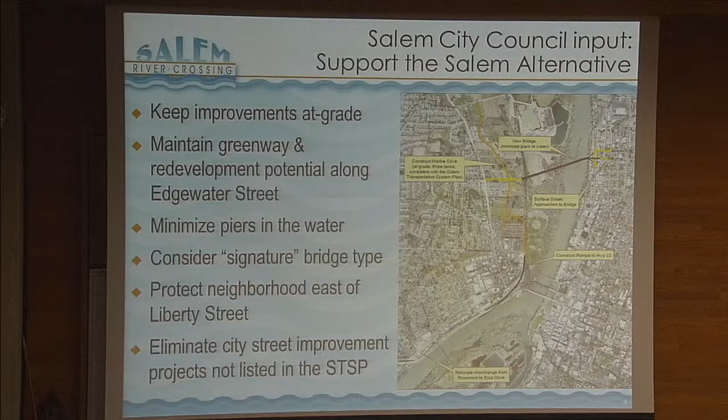And to eliminate all of the street improvements — and there were significant numbers of street improvements, especially in West Salem, that were not already listed in the Salem Transportation System Plan in support of 4D. So just keep it to the projects that were already on the Salem Transportation System Plan. So that's just by way of review.

What the oversight team did in selecting the preferred alternative is they, in essence, adopted the Salem alternative with some specifics. One of them was that there be a direct connection to Highway 22.

And you see the ramps — I know this is hard to see, that's why I printed the slides out for you — but the overhead ramps that connect Highway 22 onto Marine Drive, that Wallace Road at Orchard Heights be widened a little bit, and that Marine Drive be in fact constructed consistent with the Salem Transportation System Plan, so that as these ramps come down, the intersection at Glen Creek be at grade, and then that the remaining portions of Marine Drive be at grade, and that Marine Drive end at River Bend Road, which is exactly what the TSP says.

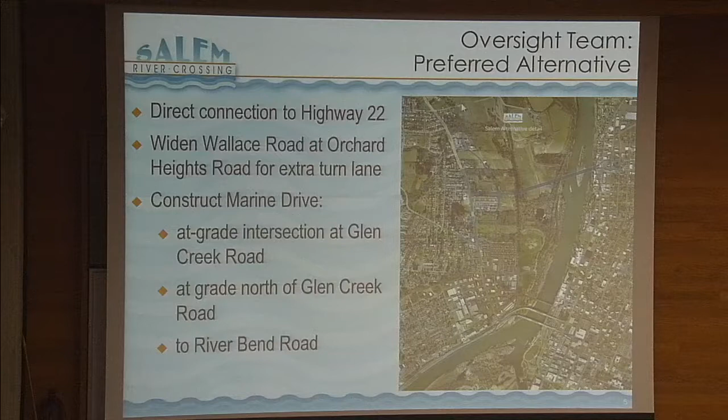For the bridge structure itself, the oversight team has instructed that it be 2 lanes in each direction — 2 lanes eastbound and 2 lanes westbound — that there be robust bicycle and pedestrian facilities included as part of the construction, that it be able to be designed as either 1 or 2 structures, and rather than the curvilinear alignment that I think 4D had, the oversight team's recommendation is that it be a straight alignment over the river to allow for, as council had recommended, reduced piers in the water, and then to be able to evaluate signature bridge types.

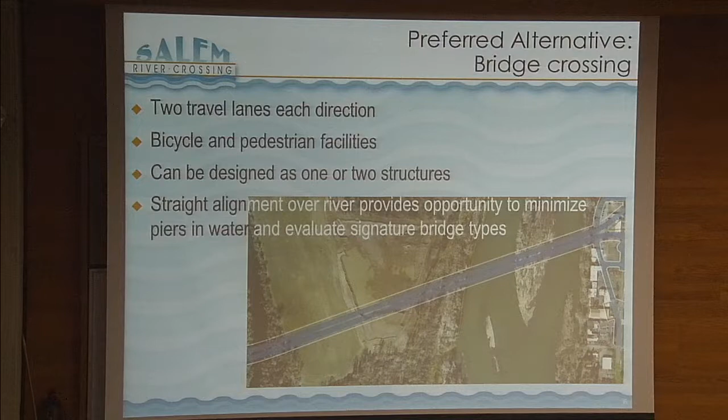So that work was done last summer, or a year ago — it's been a little while — when in essence the Salem alternative was adopted as the preferred alternative by the oversight team in February of this year.

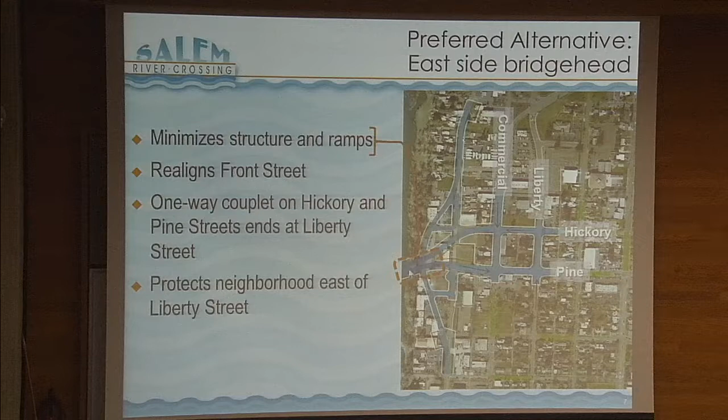With respect to the East Bridgehead, the preferred alternative also spoke to minimizing structures and ramps. What you see here, I have highlighted the piece as the bridges, as either the one bridge, the ramps off the bridge. What's highlighted in a little darker blue, with a box around it, is the stuff that's structural. The remainder is either an abutment or comes down onto the ground. So by the time these things reach Commercial Street, these streets are at grade.

I wanted to be very specific that this is the part that's still up in the air, to allow for Front Street to come under, and then these start coming down — Pine Street is one way to this point, Hickory is one way from this point onto the bridge. Commercial, of course, is already one way south, Liberty is already one way north. There was a lot of discussion about Hickory being only a right-in, right-out to discourage through traffic through the neighborhood, and then Pine, of course, is our arterial that already exists.

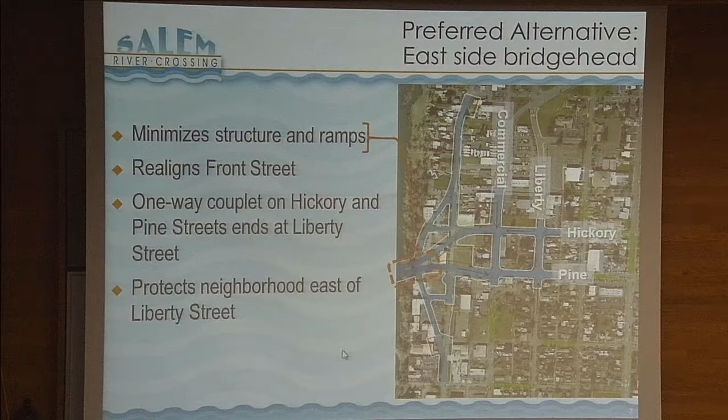So the realignment of Front Street, again to reduce the impacts of the bridge, the one-way couplet, and protecting the neighborhood. Okay, on the west side, the Salem alternative spoke to moving the...

Interchange here with Edgewater, moving it over to Eola. There was a lot of discussion, a lot of analysis related to that. There are some significant issues related to that. The issues were such that the recommendation was that there's an understanding that it needs to move. We're not quite sure — the oversight team did not come to a conclusion as to exactly where to move it to.

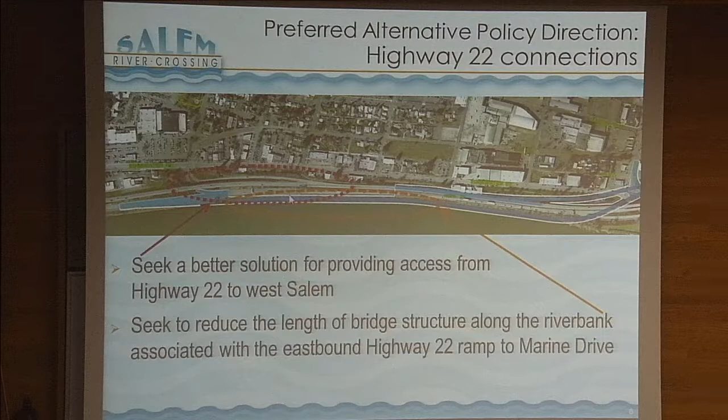But there is some policy direction related to seeking a better solution for this access, recognizing that this is not the right place — there needs to be a better place for it, whether it's at Eola or Doaks Ferry or something else. And if we can remove the on-ramp, this very long stretch of ramp that leads to the connection to Marine Drive could be significantly shortened to reduce the visual and possible environmental impacts to this part of the improvements. This long ramp has everything to do with the weaving — not wanting these cars to be able to move over and weave onto this ramp for safety reasons.

In addition to the bridges and the roadway system, the Oversight team also spoke extensively about bicycle and pedestrian safety. There is some policy direction related to creating separate bike and ped facilities as part of this project, and to encourage some looping. I'm going to show you some work that's already been done.

There was also extensive work done on creating transit supportive improvements, coordinating with transit about where to design stop locations, and considering transit supportive amenities in the design, so that the bridge and Marine Drive and its intersections with Highway 22, and its connections with Pine, Hickory, Liberty, and Commercial, be transit supportive.

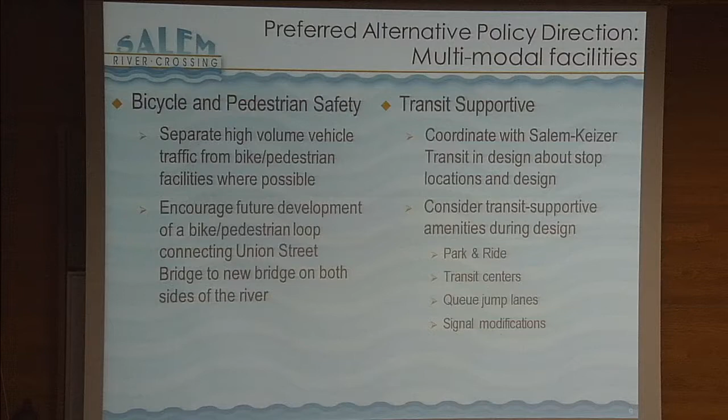I know this shows up pretty good on the slides here. So what I wanted to show you is that the blue represents the street improvements proposed in what is now the preferred alternative. I want to show you the work that's already been done for pedestrian and bike facilities.

The green is the beginning of the concepts, and this is by no means a design, and by no means the final recommendation. But I wanted to make sure the council understood that there's already a lot of work being done to think about how to connect Union Street. This is the Union Street bridge, and this is the connection that comes down.

There would be a ramp that would come up along with the ramps so that bicyclists and pedestrians can come over the Wallace Road interchange here with Highway 22, and then be able to either come down onto Edgewater or make the connection back underneath and onto the existing bridges.

This is our pedestrian connection on the existing bridge, and you'd be able to make that connection right there, and then this connection along the Greenway. So a lot of thinking is already taking place at the EIS level, not waiting for design, as to how this may be possible.

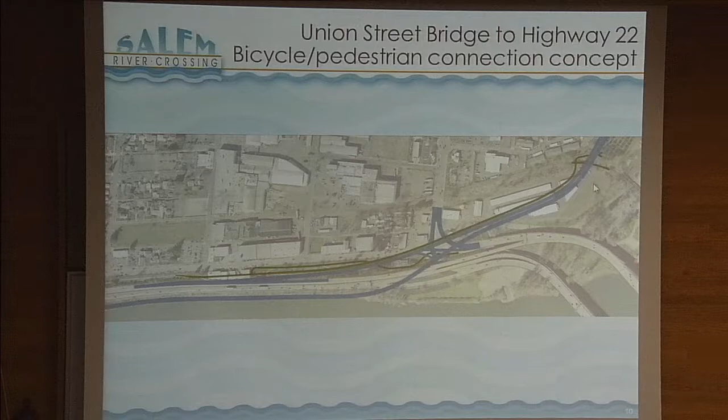Same thing on the east side. This is an attempt to start to think about, for a bicyclist coming down Commercial Street, how bicyclists and pedestrians can not only get on the westbound bridge, but also avoid the intersections on Commercial Street.

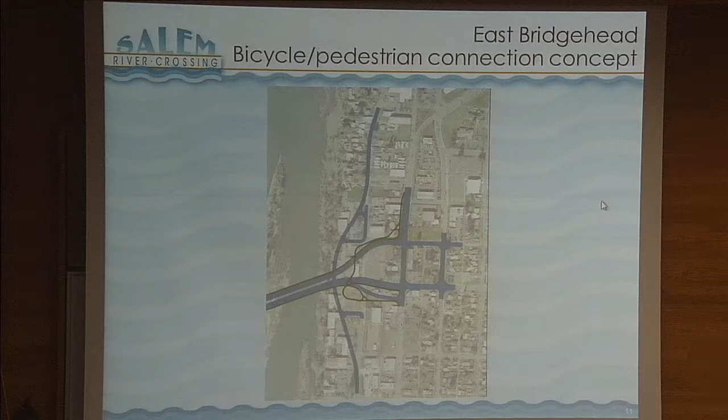So how they can come down and underneath the bridges and then either connect to the eastbound bridge or get back down onto Commercial Street, again without having to cross the interchange. This is not the only solution. There may be other solutions, but again, just starting to think about what is possible.

I wanted to show the council the results of the good work related to the Salem alternative. Under Alternative 4D, you see a summary of what the impacts would have been under the original 4D for displacements, tax lots, properties impacted, and acreage required, and how much fewer it is under the Salem alternative. So good work that's already been done, influenced by the council's recommendation, and we can already see the changes as we move forward.

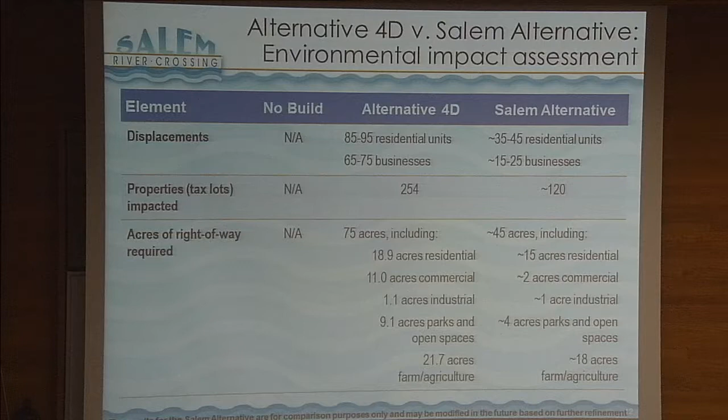Okay, so that's the Salem alternative. The next step is selecting bridge type, the part about selecting a signature bridge. I want to talk a little bit about how the Oversight team went about selecting it. The Oversight team members are here, so you can get into that discussion with them in a few minutes.

One thing I want to clarify is what the oversight team has done is select a type. The bridge type is part of the EIS, and it establishes the general form of the load-carrying structure and the general shape. Then there's another part that comes as part of the design, after the EIS, when we're actually designing the facility. The design establishes the size, shape, and proportion of bridge elements, bringing forth aesthetic goals. I want to show you two pictures. Neither is the type that was selected by the oversight team, but we wanted to show you this example — this is a beam type bridge. They're both beam type bridges.

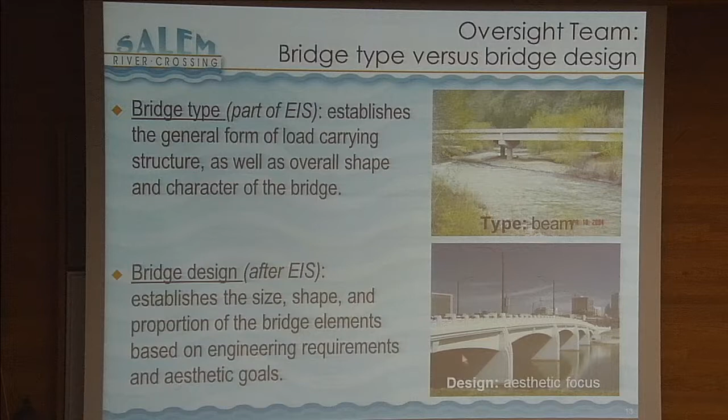The top is a very simple beam type, obviously in a more rural area. The lower one is a beam type bridge with aesthetic qualities put into it. So the difference between the top, which is what the oversight team has recommended, and design, or what comes later. Just to start getting a sense that there's a lot of work still to be done to get from the simple type to what is actually designed.

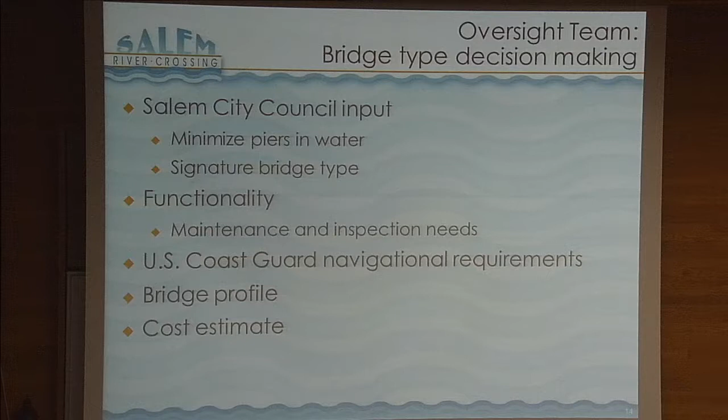So what the oversight team did in selecting the bridge type is they considered the council input about minimizing the piers in the water and addressing the signature type bridge. They thought about functionality, maintenance, inspection needs of the facility after it's built, and constructability. They thought about the Coast Guard navigational requirements. Both channels on both sides of that island are still navigation channels that the Coast Guard administers.

They thought about bridge profile. Should it be a big bridge? Should it be a simpler, cleaner line, if you will? And they thought about costs and where we would be with respect to the cost of the structure.

So that left them the 3 alternatives, 2, 3, and 4: the steel tied arch, the cast-in-place segmental concrete, and the segmental precast. 3 and 4 are very similar to each other. After some additional work that the consulting team and staff did, the oversight team recommended the segmental precast concrete box, or what's called alternative 4A, as the bridge type.

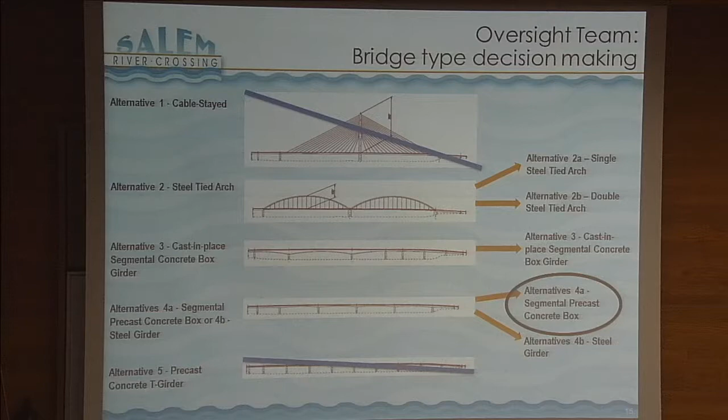So what is a segmental precast concrete box bridge? Let me show you first what it looks like. So the way it lays out, you can see that there are piers on the island. These are the navigation ways on the Willamette, and then there are only really 4 additional piers here in the water, and then they come into the banks.

Julie, I see you reaching your microphone. I was just going to point out that this is shown as 2 structures. It could be one. It could be designed as 1. You would have half the number of piers, but the piers would be larger, so the square footage would be the same. These would be thicker, if you will.

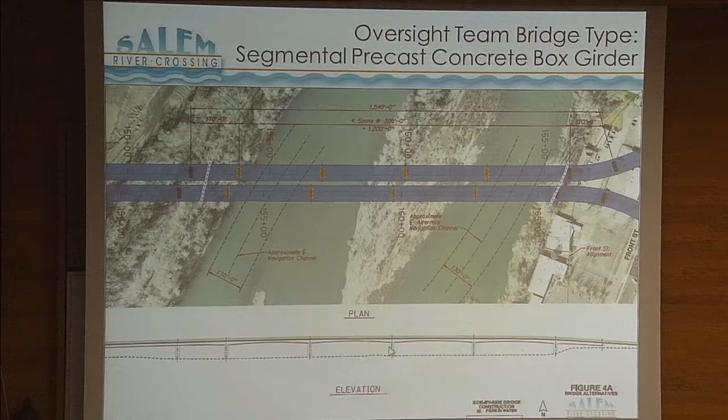And then it would still diverge here to address the traffic issues once it comes off. You see the center line of Front Street is right here, of the realigned Front Street. And then there's the elevation, thinking of the 2 pictures I showed you previously, here's the simple elevation of the bridge. In this picture, the island is underwater, this is a winter shot. In the summertime, the island reemerges back in here.

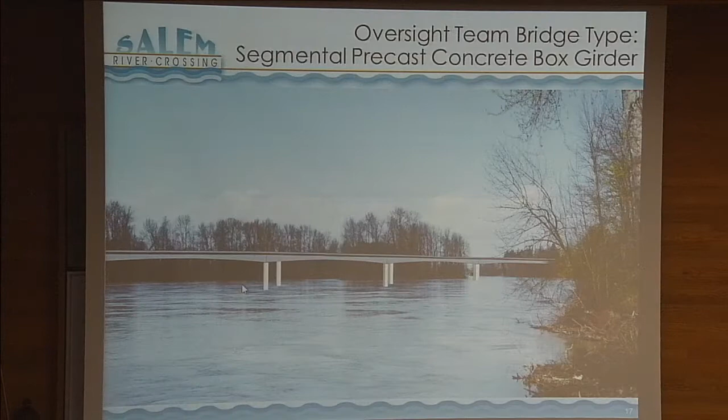And then just some pictures of what this structure looks like. So you can kind of see, if I go back one, these kind of arch-looking structures, you see the arch-looking structures here. This is the way the piers may look like. I'm going to show you a lot more pictures of what the piers may look like.

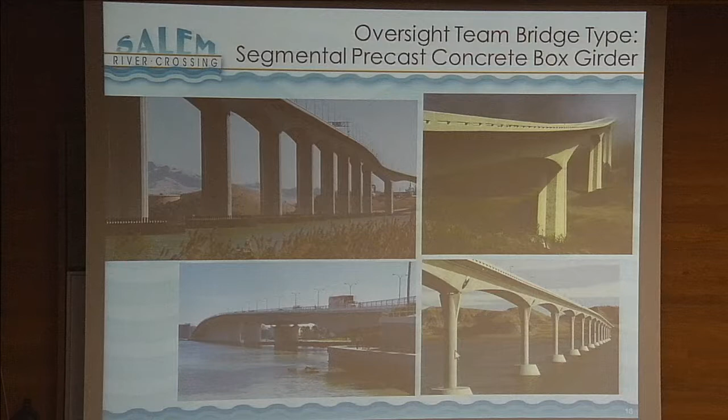And the other thing that's important to note is that the box girder is not like the Marion and Center Street bridges, which are beam bridges. So this structure is actually a box. You can see it here under construction - they're actually cast off-site and delivered, and then, to use a layman's term, they're glued together to become this kind of structure. So you don't see beams, what you see is this very clean line that goes across.

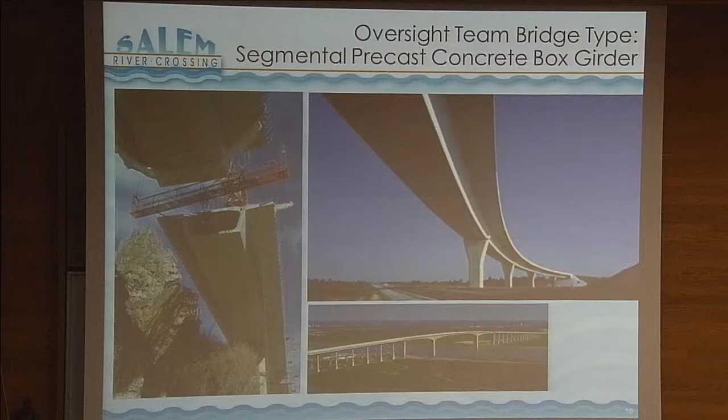So just so that the council gets a real good sense of what this kind of structure looks like. Okay, so that is the bridge type that has been selected.

So then the next thing is, all right, what about mitigation? So what I've shown you is very simple lines, the structural elements. In terms of bridge design aesthetics, we can obviously talk about the visual impact. There's a visual impact section of the EIS that policy can be put into so that mitigation can be addressed. The EIS can say we want the aesthetics addressed - we don't just want simplicity, we want some more work done.

Sonny Chickering can talk about some examples they've done in Eugene where aesthetics was put into the EIS, and then there were citizens committees or technical committees that helped with that. The EIS under design aesthetics can specify the process, the committee example, and identify parameters and key policy directives. We'll also talk about east side impacts, including mitigation measures related to socioeconomic and land use sections of the EIS, again specifying the process and identifying parameters.

One of the things the council directed us to do was to already start looking at planning for the east side land use planning. We did attempt to get a transportation growth management grant that was not awarded in this round. We would expect that when TGM comes again in a year or two, we can continue to seek out those grants. What we heard as feedback is that once the EIS is completed so that this process is set, that grant could have a better chance of being awarded, since we'd know we're headed in this direction.

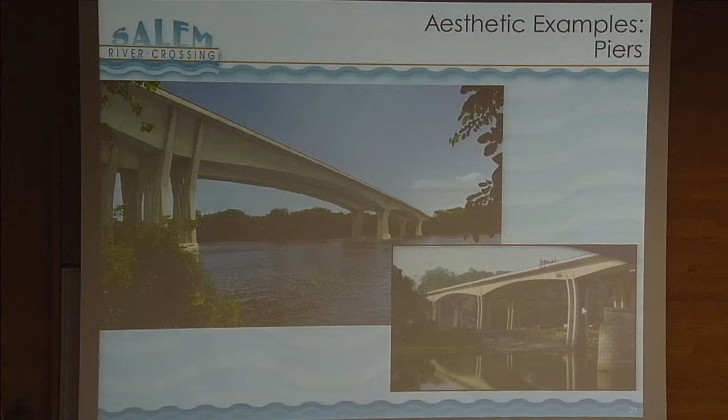Okay, so just some aesthetics. The first thing is that we can certainly bring a signature feel to the precast box girder through the design of the piers. So you see here this kind of design. What I showed you before was very simple piers. Well, here's a more dramatic pier. In fact, this is very similar to the crossing of the river, so you can see what that could look like. Here's another kind of pier, a more complete pier, but with the middle done in a different color and texture.

I've also highlighted, though I'm not going to have a slide on it, pedestrian lighting. You can start to see that this is another design element we can select, pedestrian lighting that's a little more pedestrian friendly or a little more attractive than just the standard aluminum, fiberglass luminaire.

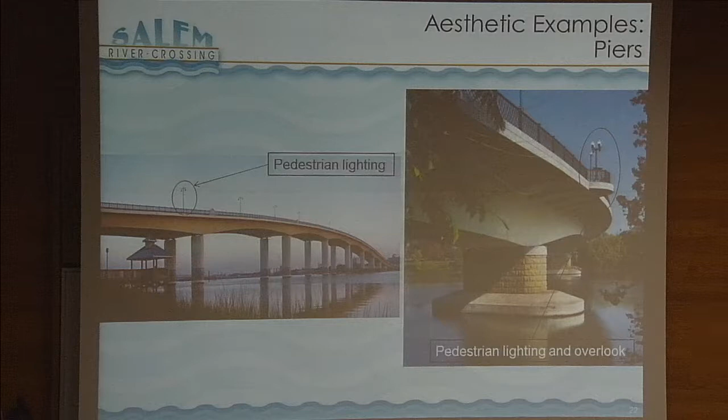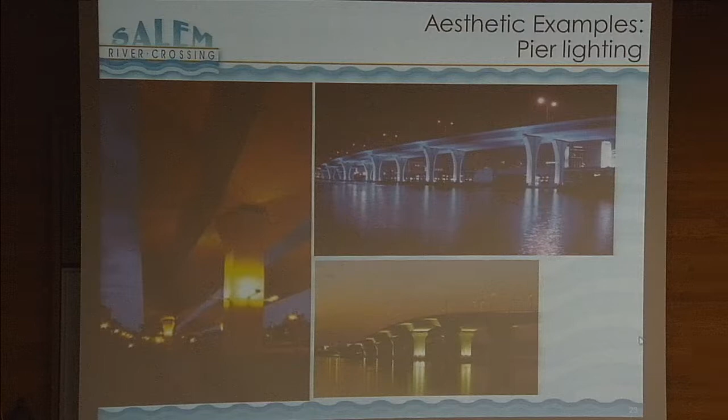Lighting is another thing that can be brought to bear on the bridge, and you could certainly think about pedestrians standing on the Union Street Bridge and looking out to the north at night and being able to see something like this. Not very expensive to install, but it can be designed to provide a little more drama on the river crossing.

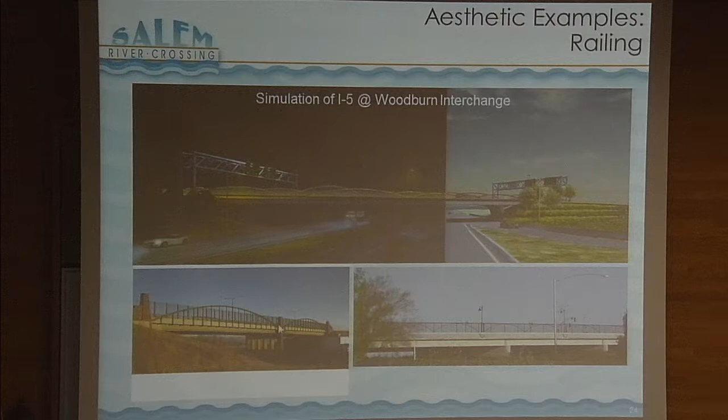These are a couple of bridges. What I'm really trying to show here is that these aren't necessarily the same bridge type, but I want to show you railing possibilities. Abutments: again, not the same kind of bridge, but these kinds of design elements can be included in terms of how you want to introduce the bridge to the motorists and pedestrians. You can see that these two bridges are actually the same bridge. So again, this is the kind of pedestrian lighting we have in town, which could certainly be introduced onto the bridge, as well as some abutment feature.

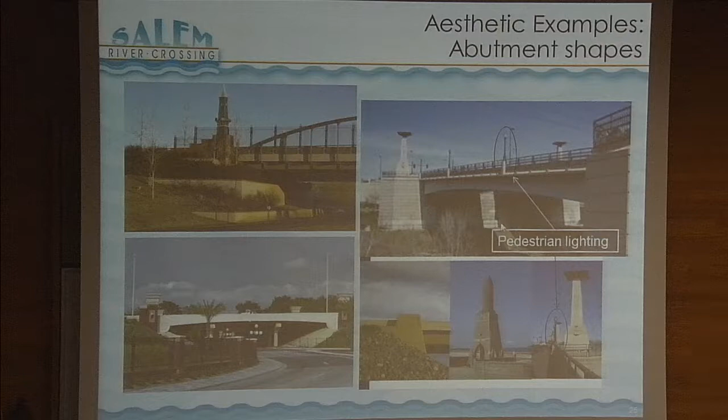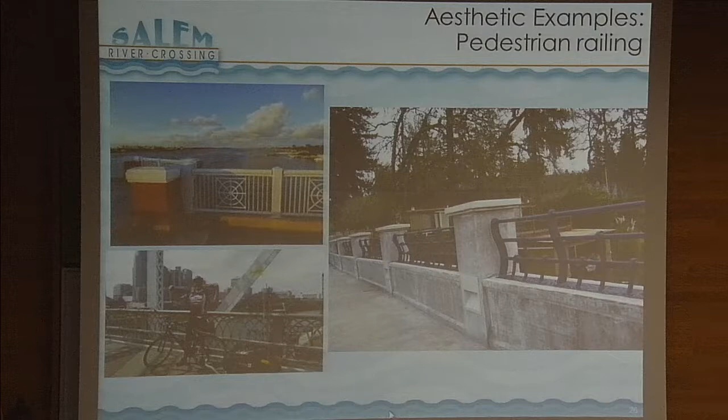Handrails: so many different kinds of handrails. Here are three examples, showing what pedestrians crossing the bridge would feel. So instead of doing some kind of big railing like the Woodburn interchange, this would be a different kind of treatment.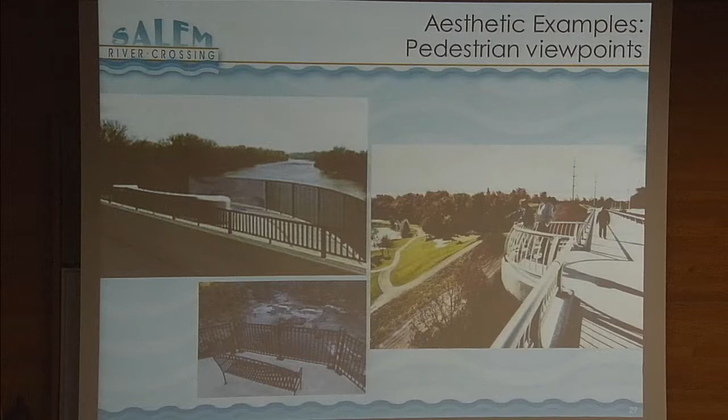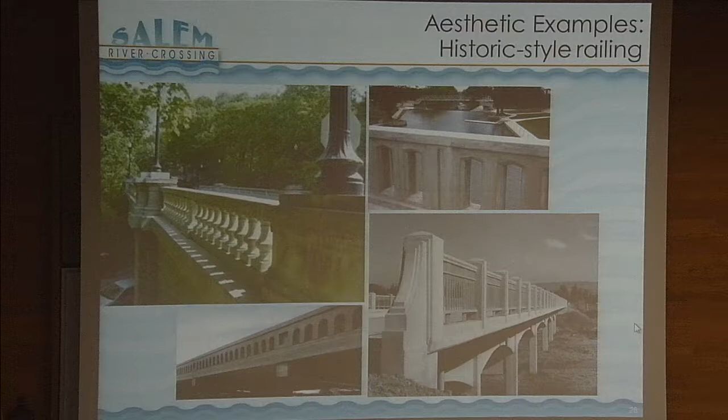So all of these are just opportunities, and what I want to show you is that there are a number of opportunities. Historic railings, you saw the work we did right out here on Commercial Street, where we recreated historic rail. This rail is actually very prevalent in Salem. We have some of it right here on High Street. And then just a little more modern interpretations of historic rails that could also be used. We're obviously not going to do a mishmash, so we would need a bridge architect to help us put it all together, but these are some of the aesthetic possibilities.

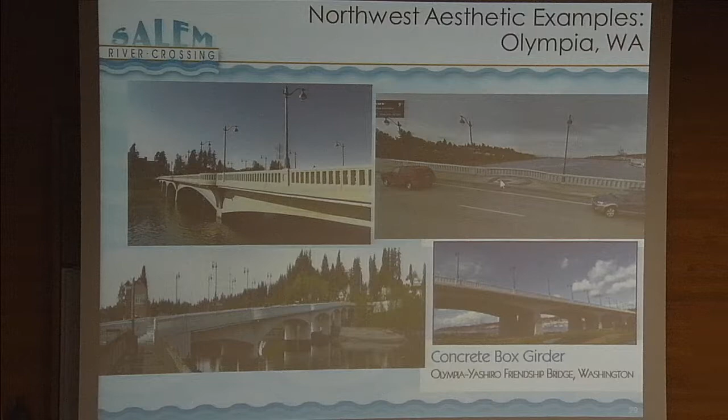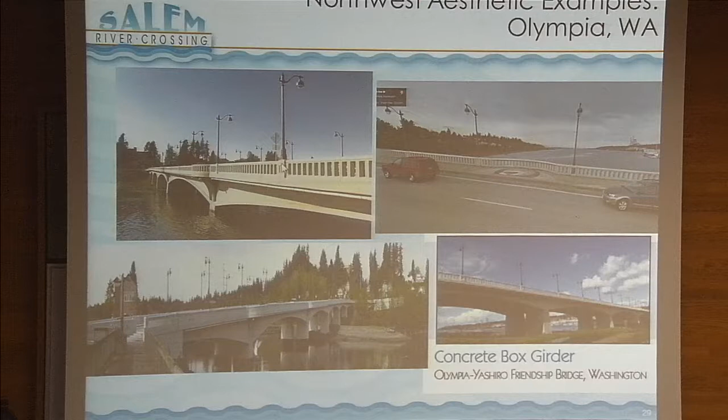And then here is what I call the Northwest aesthetic. This is a bridge in Olympia, Washington, and you can see what they did. This is a box girder, so it's the same bridge type, and you can see what they did with the handrail, what they did with the lamps, what they did with the overlooks. You can see the overlooks here. So, my personal opinion, a very attractive bridge. This is a much lower profile bridge, and it's not going over a navigable waterway, but these same kinds of elements could be introduced into our bridge.

A little discussion on the east side bridgehead, because as I've discussed this with councilors privately, I know there's a lot of concern about the east bridgehead and what's going to happen. I wanted to remind you that this is the part that's up in the air because of the council direction that we wanted to maintain Front Street, the connection to Front Street. So the way this is laid out today, this is up in the air coming down, either coming up onto the bridge or coming down off the bridge, and Front Street actually goes down a little bit to minimize the height of the bridge as it launches. And then Pine Street, obviously to the intersections, or coming off of Hickory and onto the bridge.

There are some things that could be done to address the bridge some more at the east bridgehead. If council wanted to recommend that the bridge launch from the bank, we could lower this part of the bridge further so that it had more of a street feel until you got to the bank, and then it would rise and go over. It's all about what we do with Front Street.

So a couple of options. We can disconnect Front Street. If we disconnect Front Street, we can envision more traffic—without running a model—on Commercial and Liberty, and perhaps some of the other streets in this neighborhood, as this traffic finds its way from north to south and south to north.

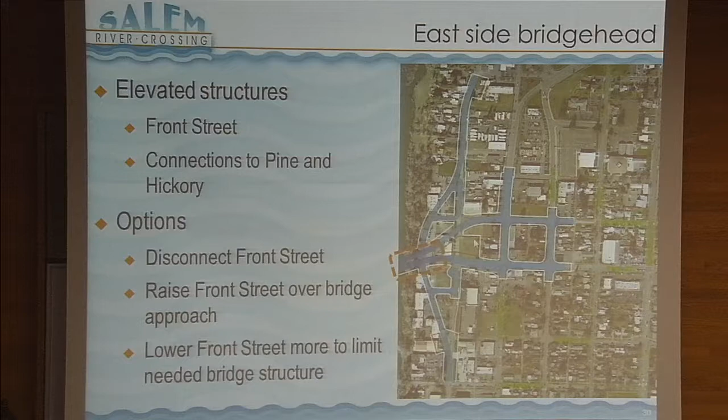Just a quick slide on next steps. There is a funding workshop on December 3rd. I assume everybody has gotten their invitation—the invitations went out on Friday, so if you haven't gotten it yet, you will be soon, getting them the next day or two—where all funding options are going to be discussed. And it's very important to provide our consultants with feedback about what options are really non-starters and which options are good possibilities, to feed that into the EIS.

Oversight team meets again on December 11th. And then if the oversight team is ready to make some final decisions, we are on our way to making the final EIS preparation, where we'll do refinements to the impact assessments, refinements to mitigation measures, which is what we're talking about today.

And then we're on to land use approvals, which there's a very tough row to hoe on, so we will be working on that the first half of 2015. And then once the land use approvals are complete, we will look to have a final EIS published.

And then seek a federal highway record of decision. And as I mentioned when we went through this late last year, the license is issued, and then it's a matter of waiting for the funding so we can fund design, and ultimately fund construction, which is a whole other process. So once again, the EIS is about getting this license granted to us as a region to be able to design and construct this bridge. And with that, I think we're ready for questions and discussion among the groups.

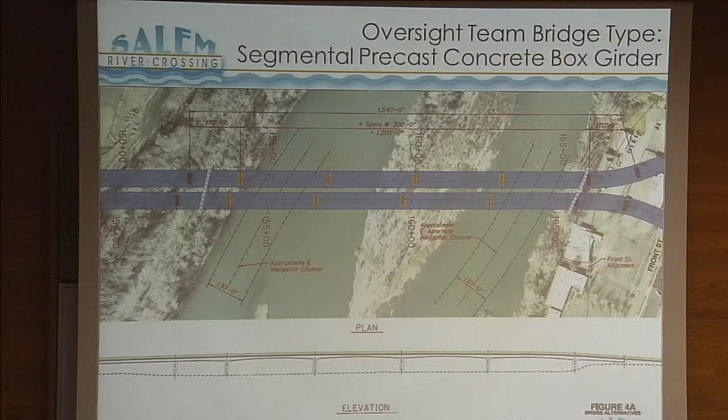What's important to note, though—let me get to the picture I have of the east bridgehead, because I think that's an important consideration. Irrespective of whether this is one structure or two, the approaches to the bridge have to be this one-way pair. Because if we don't do this one-way pair, these intersections—if we just had one bridge coming all 4 lanes onto Pine Street—these intersections become quite untenable, quite large. So what the staff and consultants are attempting to do is really minimize the amount of delay, so these aren't as wide as they'd have to be with just one bridge in both directions.

So we're creating this traffic flow here, and this traffic flow here, we can turn south or turn north or keep going, so that this is still a manageable area traffic-wise and not a massive intersection here. So this can be one structure.

This street still has to come in this direction, and this street still needs to come in this direction, so that this surface works. And this is being done, Councilor, to really protect this neighborhood, to keep this at a manageable level so that traffic flows smoothly. We're not backed up to here. People aren't punching through and then trying to come around here, because that's an important consideration for us in the community, to make it all work here.

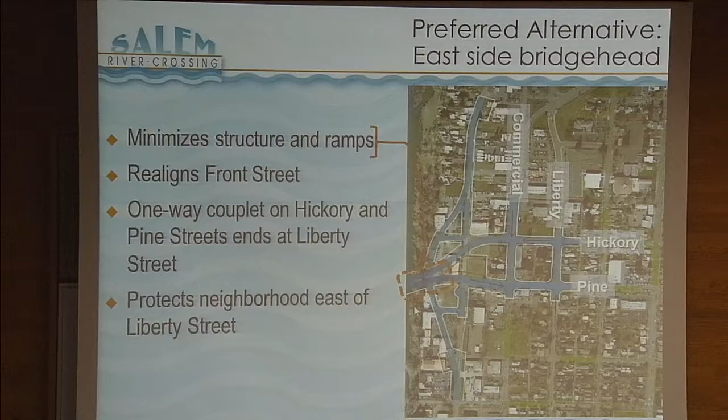Yeah, and I recall those directional plans with one bridge. Yeah, right. It can still be one bridge.

What I worry about, I guess, is looking at it, given sort of mission creep on this constantly over the years. I'm looking back over the years that this has been discussed, that it really starts looking like the plan is for ultimately a freeway through that neighborhood. Just to be honest with you, that you put 2 bridges there, and over time, this becomes really a regional solution.

Not what I'm interested in. I'm not interested in solving the big regional problem that ODOT has. I certainly am interested in solving the problems we have. But this has never struck me as the right location for the big regional solution, that belongs somewhere north of Salem. And that bridge is a different bridge, and that freeway is a freeway.

This starts to have that look, and it has all kind of all the structure in place to become that solution. And that's exactly not what we proposed back to the committee. They had their freeway. This looks like it's coming our direction again as a freeway.

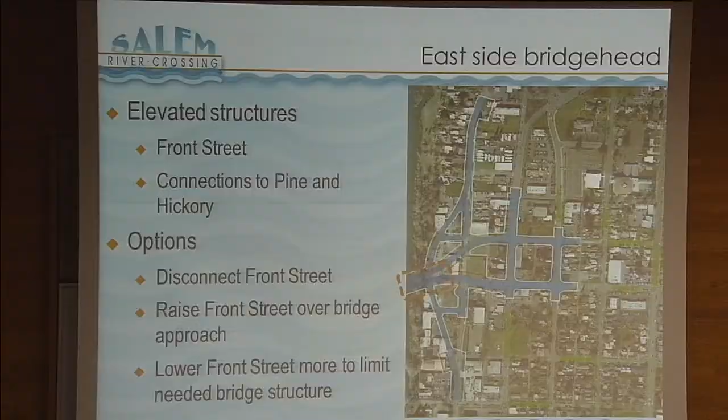So if you think about Marion Center, the reason those things stay up in the air for so long is they cross Front Street, and then they dive down onto Commercial Street. We moved, working with the council, we recommended moving Front Street over and dipping it down so that bridge can come down faster.

Well, that bridge can come down even faster. It can launch essentially from the bank so that Pine and Hickory feel like a surface street. But the council has to say we're going to do something different with Front Street, so that we can really attenuate the bridge, the entrance and exits to the bridge.

Well, I appreciate what you're saying on the east side, and then I look across at the west side section and the sort of empty space that has not been resolved, the look of it, and we of course haven't seen it yet, but I assume we will at some point, what it would look like from Edgewater. And I'm beginning to get the feeling, when things start flying high over the top in order to connect to 22 the way you describe it, it becomes troublesome.

It continues to have that sense of a freeway, and that's where this is ultimately headed. And I find that really troubling. I thought we had brought this down also on the West Salem side as well. And it feels, again, like it went up in the air, that it is moving around along Edgewater. I don't know whether it creates a wall on Edgewater. Certainly, it doesn't sound like it does to the extent that 4D did, which was just create a wall. But I'm not sure what that looks like as you start to connect.

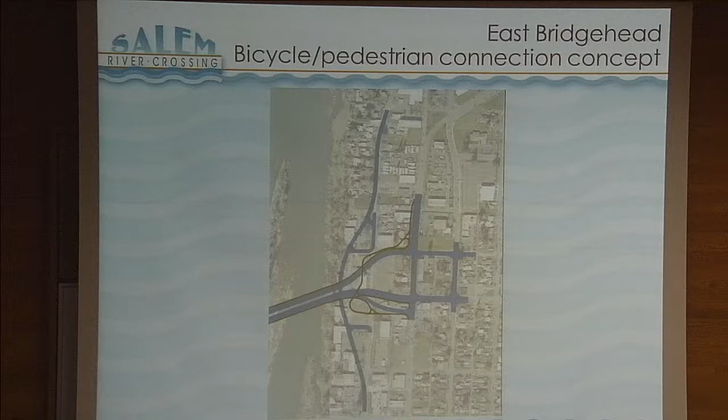Okay, I was just going to add that the blue shading is really where there'd be changes in lane configuration. It doesn't mean that we necessarily need additional right-of-way in those locations. I believe that the right-of-way for both Pine and Hickory is adequate. It would just be a restriping, and the same up to the north with Front Street and Commercial. There might be some sliver takes, but the main part of the right-of-way required is going to be, you got rid of the map.

Oh, sorry, you confused me. Sorry, right here. It is going to be west of Commercial Street. When you have to start those realignments to ramp up, that's where the right-of-way acquisition is going to be needed. Okay. And then on the west side of the river, right, that's why I brought this up, Marine Drive.

Marine becomes, there's just one lane coming off Highway 22, right at the surface. It drops down, so this is a surface intersection. This is a through lane, left turn lane, one lane northbound, one lane southbound, and a left turn lane. Then this is two lanes all through here.

And then it widens here, and I forget, is this one or two right turn lanes? There's an added right turn pocket, so there'll be two right turns. Then for the southbound, there would need to be a second southbound lane just to Beckett, to receive the two left turn lanes. So there's double left turn lanes here, and then it drops down to one lane to then be able to get on.

So this is all two lane, as we had talked about. It does widen out at the signalized intersection here, and then it drops back to two lanes up to Riverbend. So what you have is a four-lane roadway here that comes to the intersection of Wallace Road. This four-lane becomes a one-way eastbound, and this one-way westbound comes on here. Big intersection here, drops back down to two lanes to get on Highway 22.

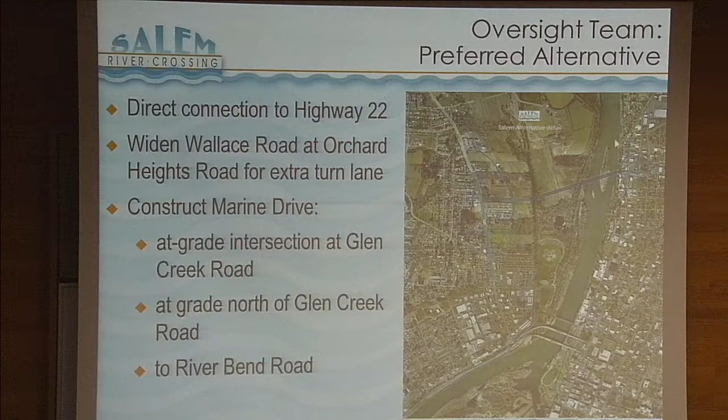In boiling it down, big picture, if I was driving from the Parkway going west, or if I was driving from the west going east up towards the Parkway, I would have a total of two additional lanes that I could shoot for, being Marine Drive. Otherwise, there's nothing new in terms of my ability to get from the west side of Salem to the east side of Salem, because I'm going to be necked down on Marine Drive. Sure, I've got four on the bridge, but I only have two additional lanes to get there.

Well, this was very important - this whole Marine Drive thing was a viaduct. So this was all up in the air, and this was, in essence, a freeway connection onto here, and then there were ramps here. So this was a freeway connection from 4D, from Salem Parkway to Highway 22. The recommendation from the council and what the oversight team selected, which I think is important to recognize, is that this, other than these ramps here, this Marine Drive is exactly the same as we have it in the Salem Transportation Plan, except for the new intersection, which then widens to accept the extra turn lanes, because this is a signalized intersection.

Is Marine Drive an arterial? Right now it's a collector. The plan, what the council will see at some point, is a proposal to reclassify this part of Marine Drive to a minor arterial, which does not change the number of lanes. It simply changes its functional classification. It limits entrances and exits from here to here, and then collector from the bridge north to Riverbend Road.

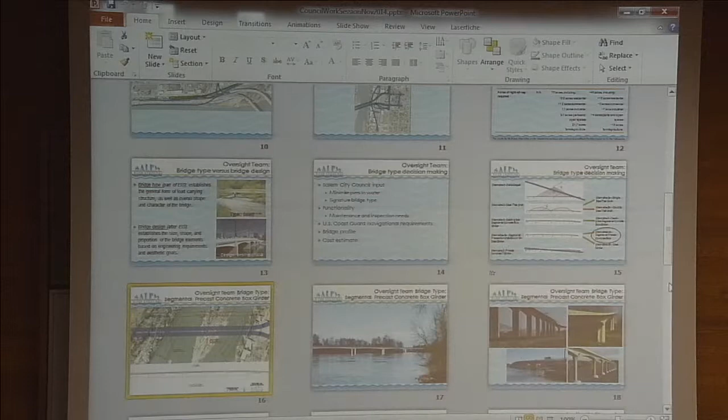My understanding is that the recommendation is for two structures, but what we have talked about is that this could be one structure. Just so council is well informed, the difference is that when you go to one structure, the piers become wider, much thicker. These are two different scales, but just to get the essence - when you go with two structures, you'll have thinner piers, two of them. When you go to one structure, you'll have thicker piers. Or the two structures could be built side by side, like this one, with two thin piers just closer together.

The issue, as I understand it, is one of inspection and maintenance, where ODOT can come through and use a facility, an arm that goes underneath. You can't reach the middle of the bridge with that type of equipment. There'd have to be a different kind of inspection if we go to this kind of thing. So that's the pitfall of one structure versus two structures.

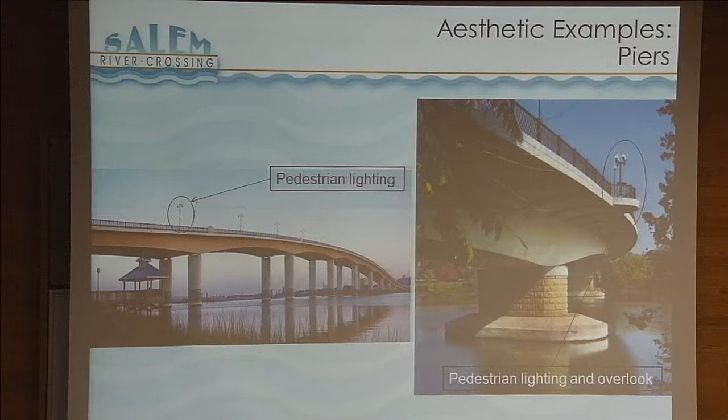The bigger footprint with two bridges would be the space between them, separating the structures. With one structure, you save that 18 feet that would be between the two.

The other issues that I think are good design issues to talk about, and it's really a detail, are: are we going to have sidewalks on both structures? Is this southern structure, or south side, going to have a wider, perhaps 10 or 12 foot pedestrian and bicycle facility, with all of the pedestrians and bicycles on this side, connecting from Front Street, as Councilor Clark was saying, onto the walkway on Marine Drive that then leads to Wallace Marine Park and Union Street Bridge and Riverfront Park? But those are design considerations - do we have two substantial bike and ped facilities on both sides, or just one side with two small ones? That will start to dictate added width to the structures when we make those kinds of decisions.

Okay, Councilor Dickey? Thank you, Mayor. Yeah, I have a number of questions. But first, I do want to say, and I wish Councilor Clark were here to hear this...

Looking at this bridge as potentially something that would serve our entire region, I totally get that. Even if we design it as a local bridge, it would definitely have some sort of regional functionality. But our Salem residents are the ones who have to look at it every single day. Our Salem residents are the ones who will bear the brunt during construction, which will take a very, very long time. They will likely bear the brunt of the cost. And so I've said this before, I know I've said it to you, Peter, that I feel a little bit like this whole planning process is a little bit flawed. I think Salem should have more than one vote on the oversight team, but that's just my opinion, because we are the ones who will take the brunt of whatever we end up with.

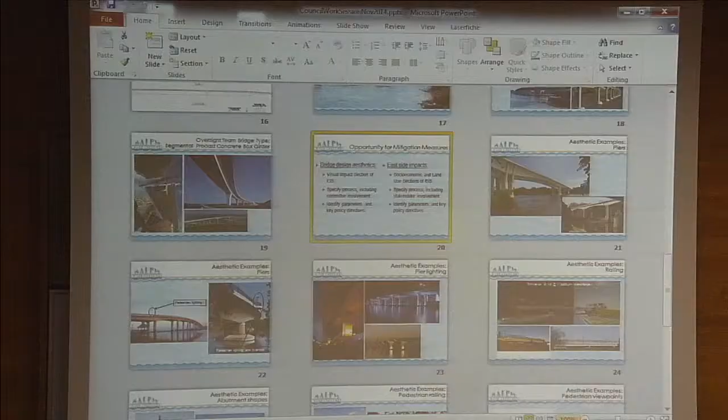Let me get to the right slide here, Councilor. So my sense, and I'll let Julie, Sunny, or Dan chime in...

What we can lock in is policy. So the EIS can say we will do these mitigations, that we're going to mitigate visual impacts through aesthetics, and we will assign a certain amount to it. My understanding is we can say through a percentage or a not-less-than dollar amount. So at this stage of the game, what we can do is lock in policies that say we want this bridge to be good looking and we want to address its look later. I don't know how much detail in an EIS we can put in about whether we want a certain kind of handrail or lighting, but I think we can put in statements about wanting pedestrian-scale lighting, an attractive aesthetic, and pedestrians feeling comfortable on this bridge.

And then on the east side, addressing the concerns I've heard from you and from Councilor Bennett, I think there's still time, beyond the bridge type, to discuss what we want to do on the east side. The streets are ours, so we can talk about what we want from our streets, and whether we want the bridge launching a little further west.

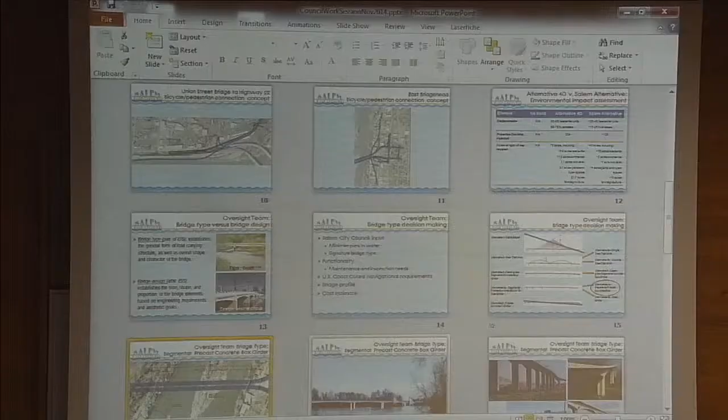When you see this plan view—let me get to the right plan view here, right here—you see the embankment, and the bridge starts coming up and over. We can have the bridge come off right here and then climb up, but we have to decide what we want to do with Front Street, because you see it's climbing over Front Street here, and we expressed that it was important to us that Front Street be there.

So if we're concerned about this looking like a freeway entrance, and we really want it to feel more like a street entrance, then we, the city of Salem, through the city council, need to talk about what we want here. That can be deeper, that can fly over, that can be disconnected—there are any number of options, each with pluses and minuses, if this is a concern to us, so that it launches from here instead of from back here. We still have time to have that kind of input into the process.

Just one more. Thank you.

Thanks, and my last question for now is about the Bridgehead. We've thrown around all sorts of things we can do there. What I'm wondering is, where is that in terms of the whole process? If we come up with some fantastic plan for the Bridgehead, do we pay for that at the City of Salem, or is it included in the whole bridge project?

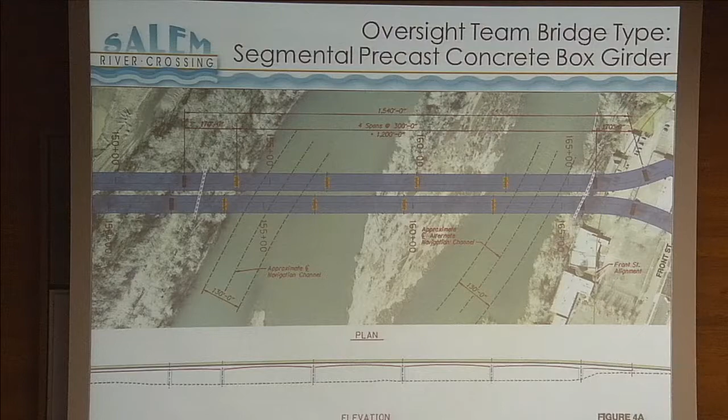What is ultimately on our backs is what we want to do with the land on the east side and the west side, how we want to zone it, and what we want to encourage. Those are absolutely local government questions we'll have to ask ourselves. We talked about the TGM grant, which we're going to seek again so we can begin to answer those questions.

In terms of aesthetics, how the bridges are designed, what kind of decoration we want to put on the bridge, and what street improvements we make to accept traffic from the bridge or allow traffic onto it, that's all part of the project.

Now, just to be clear about what we've talked about before, let me apologize for flipping back and forth, but all these pictures are here. Marine Drive has always been a city street. There's money in the bond to begin to acquire right-of-way for Marine Drive. What the council subcommittee for the bond has instructed us is that we wait on spending that money until we get a final EIS, so we know what we're buying.

The start of Marine Drive could be the city's to build, so we could come in and start building Marine Drive from, say, Glen Creek up to some point here, because there's benefit to the city to get that done ahead of time. So that's something that would either come as part of a big project, or if the project's delayed and we want to move forward as a city with this improvement, we could certainly do that, along with some of these connector streets. That's something you'd probably see coming if this takes as long as I think it's going to take with respect to funding.

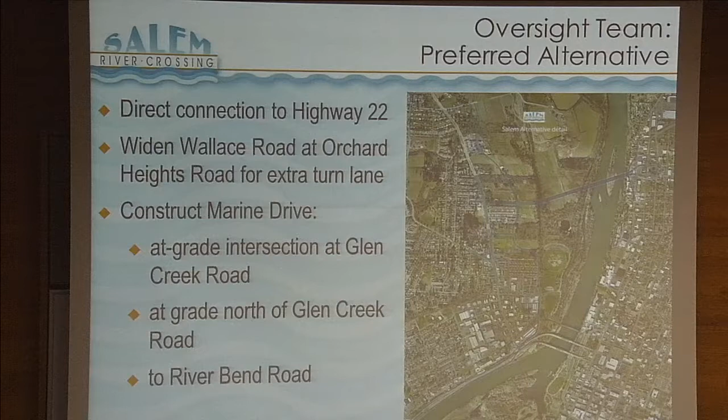One is in regards to a new exit someday on the West Salem side, as recommended by ODOT. How did the EIS encompass and take into consideration that exit or a future one, and what will the process be to determine where that ends up being, and who has jurisdiction over that at what points in time?

That is an Oregon Department of Transportation facility, Highway 22. We recognize that interchange today is a very antiquated facility, with lots of accident history. You merge left in, veer off, and come to a signal. So something screams to be done there.

My understanding, and I'll let Julie jump in, is that really deciding on another interchange could be its own EIS, since this is a federal aid facility. So rather than delay this process, what the oversight team said is, we recognize and agree with the Salem City Council that there's a better way to do this, and a better option further west. But rather than embark on this whole other sub-EIS, there's simply policy language that says seek a better solution. We know we need to seek a better solution, so go do that.

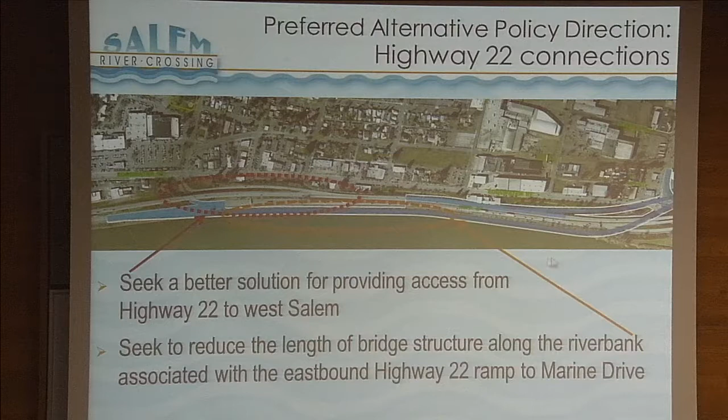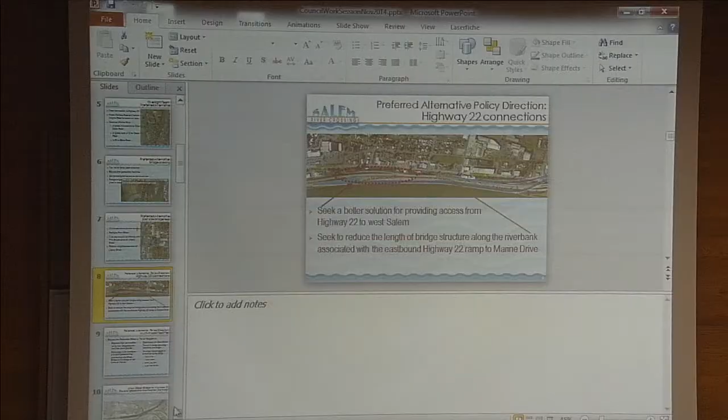Second question: the double bridge structure and the potential to join them into a single span - are there seismic issues involved with two independent facilities versus connecting them together, and which has the most seismic stability?

Yeah, I mean, unless Sunny wants to say something else, anything that's designed here, whether it's a single structure or a dual structure, will be designed to the latest seismic standards. But would one be more expensive than the other?

Seismic-wise, will it not? I don't know that I can say yes to that. Do you have any sense of that, Sunny or Tim? I'm not a bridge designer, so I can't answer your question about the relative cost of one bridge versus two, but I can confirm Mr. Fernandez is correct - both designs would be to current earthquake standards, so from an earthquake standpoint, they will resist equally.

Okay, yeah, and my concern would be with the multiple different piers and how that might affect them, and how they pull against each other. Bridges are being designed all over the world to address this issue, much wider and much bigger than this. So definitely, when the day comes, whatever we ultimately choose to do will be designed appropriately.

Councilor Bennett: just to go along on this seismic discussion, one of the other parts of our recommendation, as I recall, was to encourage ODOT to complete or speed up the seismic upgrade of the existing bridges.

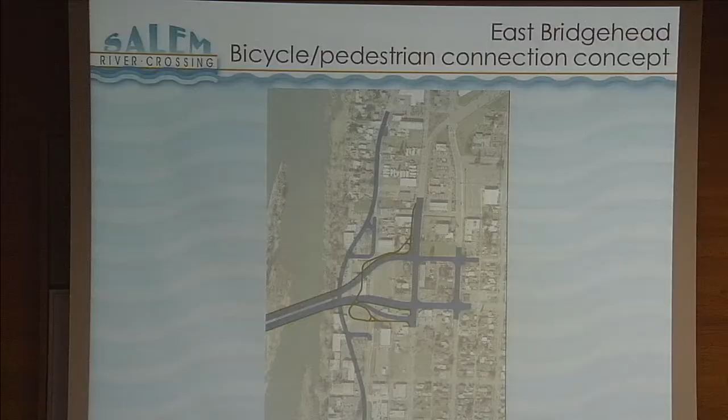So what you see here is why we put the word concept. This is a concept of how that could be done. There are many other ways to do it, but it's absolutely a given that there will be bicycle and pedestrian facilities on this bridge, whether it's one structure or two, and that facility is going to connect this part of Salem to what we already have planned on Marine Drive, on the west side, so you can connect into Wallace Marine Park, and then to the Union Street Bridge and the Minto Island Bridge. So it's just a matter of how that happens, and those are design details. But they're going to be there, absolutely.

Councillor Nanke, did that answer your question? Okay, Councillor Bennett. Thank you.

Not to debate the point with Councillor Clem, but part of the motion, as I recall, when we put together the Salem alternative, an integral part of the discussion was about maintaining the seismic integrity of the two existing bridges. We had substantial public comment expressing real concern that this was a diversion of funds away from an existing facility, one that is guaranteed to be here in 20 years, unlike this bridge. And we'd like it to be standing in 20 years. So I certainly understand it isn't part of the EIS, neither is the design.

And we're sitting here talking about aesthetics and design all evening. I feel it's far more a compelling problem in the community that those bridges be maintained for seismic integrity as well as basic safety. And right now, they're in neither. There are real problems with those bridges, and I think everyone's worried about it. If you recall, that was part of the discussion.